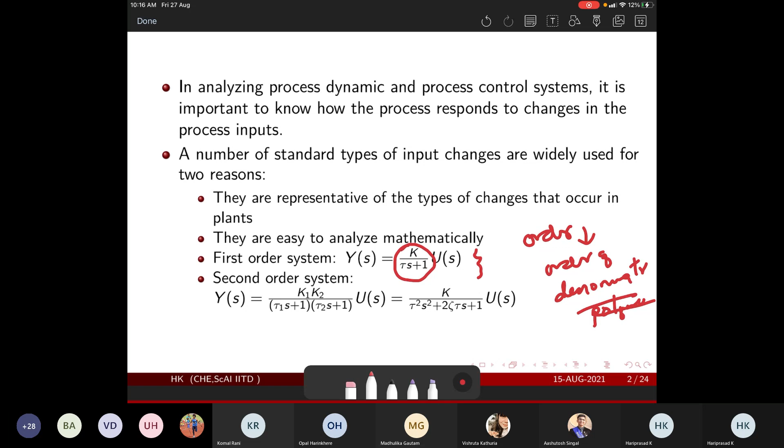Order of denominator polynomial. The variable of the polynomial is S, and we are going to look at the order of that. So first order system, we are going to see this. You see that it is tau s plus one. Tau is a constant, of course, one is a number, and in the numerator you have a constant, which we call the gain.

Any transfer function of this particular form is first order.

Similarly, by definition, a second order system: the denominator polynomial degree should be 2, of course tau square. Tau is constant, tau square, and 2 zeta tau. We'll see why zeta comes in here later, but you should see it is broadly a form of a s square plus b s plus 1. So tau square is your a, 2 zeta tau is your b, and 1.

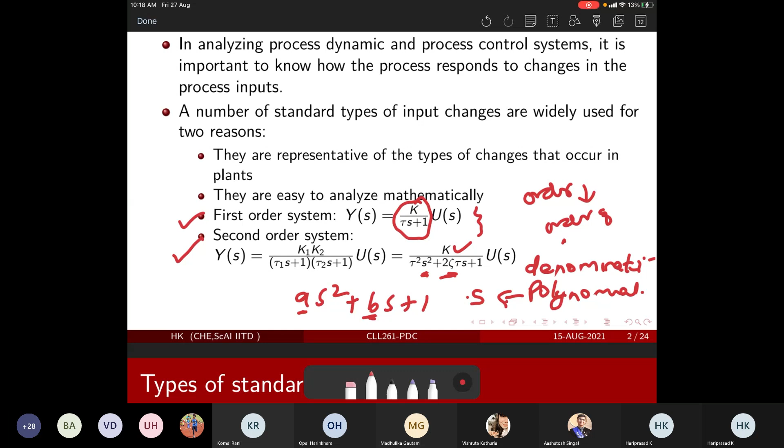And of course, denominator and numerator constant. You can also factorize it and write it as a product of two first order terms. That is what the first thing says. So this is a factorized form of the second order system, as two first order systems.

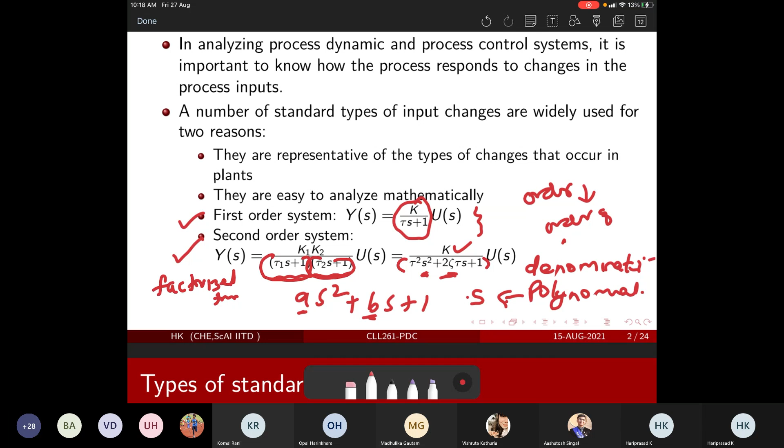We have seen last time a case where you have two tanks, and we have added them: there is a flow coming in, and that flow goes to the second tank, and finally it exits. Let's say Qi, then this is Q naught. So if you develop a model between Qi and Q naught...

We have seen that individual first tank exit dynamics are first order. We have developed the transfer function for that, and we integrate them together. This would be second order. So this is like two first order systems connected to each other. That's why I told you, in most cases you should be able to factorize them.

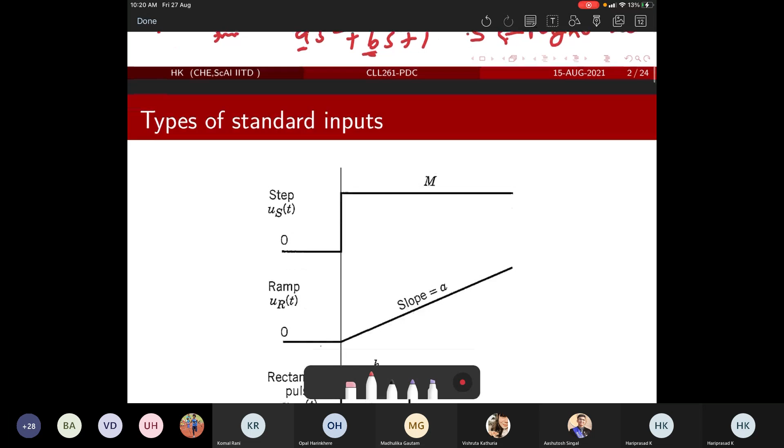So this is the basic premise we would like to operate, and we would also like to see what we need to know. Somebody was asking some question. No sir, it's just saying that.

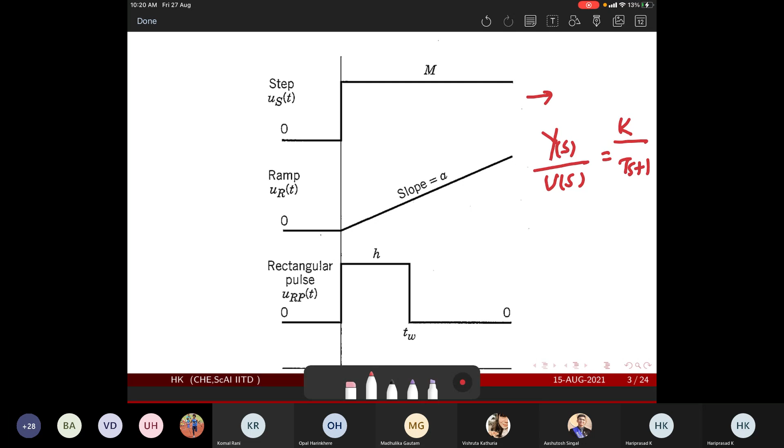Okay, perfect. So other things you would like to hear: what is our system transfer function, y of s, output by u of s? Assume it's a first order transfer function. This is the standard transfer function form. y of s by u of s is equal to k by tau s plus 1.

We are interested in this output, y of s, and it may be in the time domain, y of t. This is subject to the inputs that you provide, u of s. So u of t, or u of s in the s form, dictate the output y of t. See, it's like this, okay?

So you have a reactor, you are feeding something in, and taking it out. This is Fi, F naught, maybe concentration here. And let's say you are interested again. Consider the case where you also have a heater - this is the same example we know. We are interested to look at the outlet temperature T naught, and this is Ti, and this is Q.

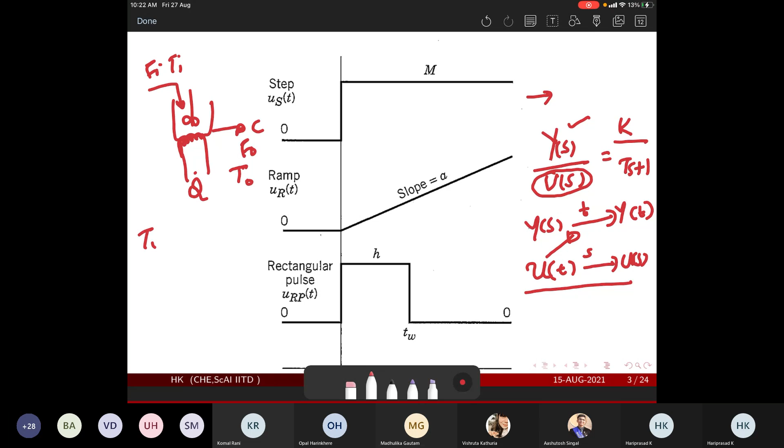So our final output variable is T naught. There are actually two inputs, Ti and Q. They are the inputs, and we would like to see how the output varies with respect to these input variables. They are not really the inputs per se, they are just placeholder names. So inputs could be anything.

The inputs you can see here is some sample input. So what is that? The inlet temperature variation, or maybe the heat input variation, could be a step - this is a step change. It essentially means that many times you did not give an input, then you suddenly changed it and kept it constant.

So heater, for instance, it's like heater off for a long time, and at that time let's say T equals 0, you started the heater, and it's like a step change, right? Then it starts imparting heat into the system, and for all future times, the heater is on.

The other one is ramp, in the sense that again, till T equals 0, there is no heat. Then after some time you switched on the heater, but you did not step it up, instead you fix the rate of change, in the sense that every minute you are changing, let's say 5 degrees C. So it's like a linear increase, the ramp increase.

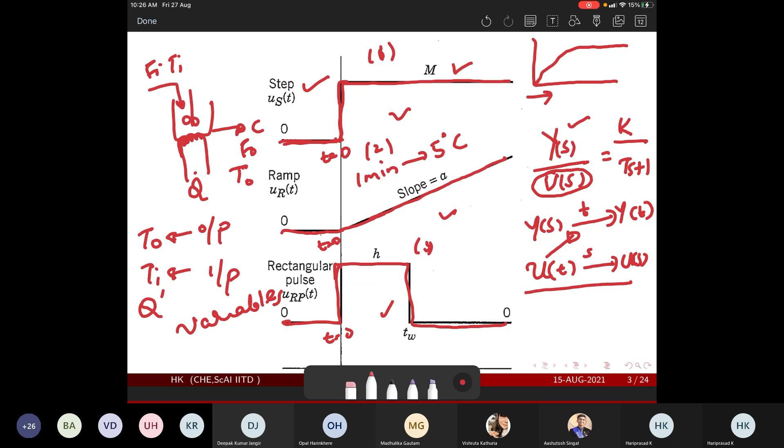Okay, so someone can think about ramp. What would happen? Can someone say please? Anyway, try to be more interactive, otherwise it's very boring. See, in ramp, your input is gradually increasing, which means that your output will also gradually increase. There is no saturation as of now.

And for pulse, as you expect, there would be a jump, step up and step down. So eventually what I'm trying to say is your system dynamics would be highly dependent upon the input that is supplied. These are three standard inputs you could expect. There are other types of input also you may see. Another one is sinusoidal, which is quite unlikely that you would use because nobody would like to oscillate your operation. So sinusoidal inputs would generally tend to oscillate your system a lot.

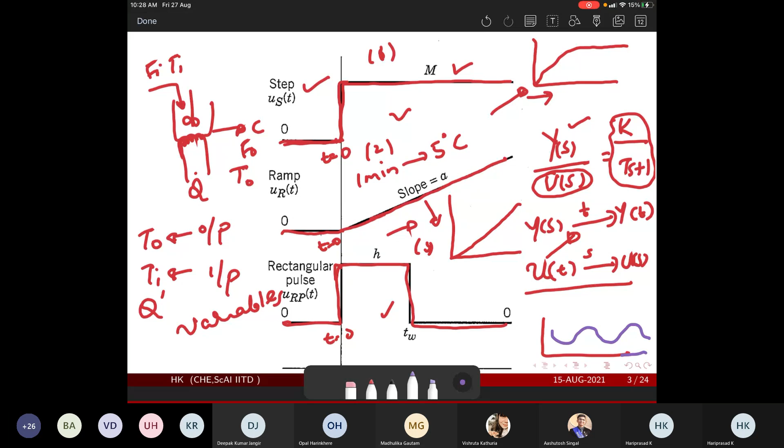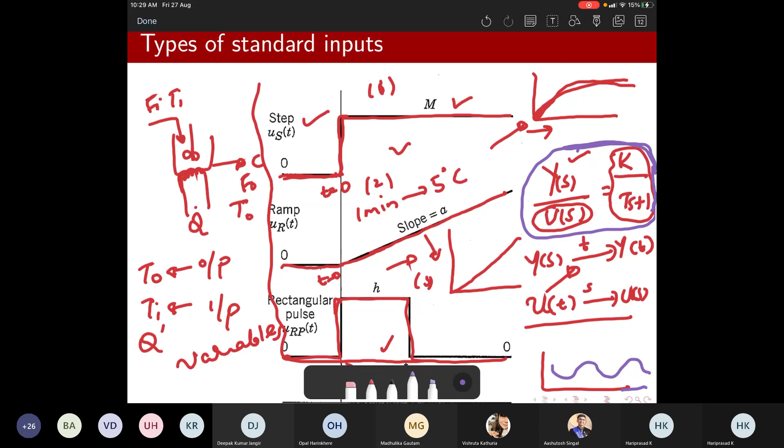So now what we are going to do, maybe in the rest of a few minutes, considering these standard inputs, can we evaluate the output response quantitatively, not qualitatively? Now we say that okay, you might have an increase, then become saturated. So if you have a first order system model, which is this, can we quantitatively express the output as a function of the input? Is this clear to you? So this is what we are going to do.

Okay, so now let's check the step input. How do you define the step input? It is many times, so let's say this is t equals 0, and this is 0, and let's say this is m, the magnitude of the step change. So generally the step inputs are defined like this. It's like switching on something. Till you switch it on, everything was 0. Then you switch on, and things got stepped up to a magnitude m, which is something that you define.

Okay, so the next one is, how do we find our transfer function? Y of s by u of s equals k by tau s plus 1. The first thing to figure out what y of t is, is to figure out what u of s is. U of s, the transfer function of a step change is 1 by s for a unit magnitude, and m by s if m is the magnitude of the step change.

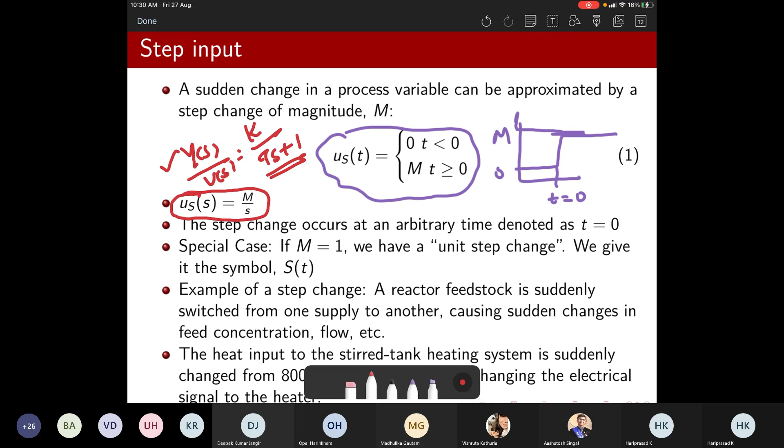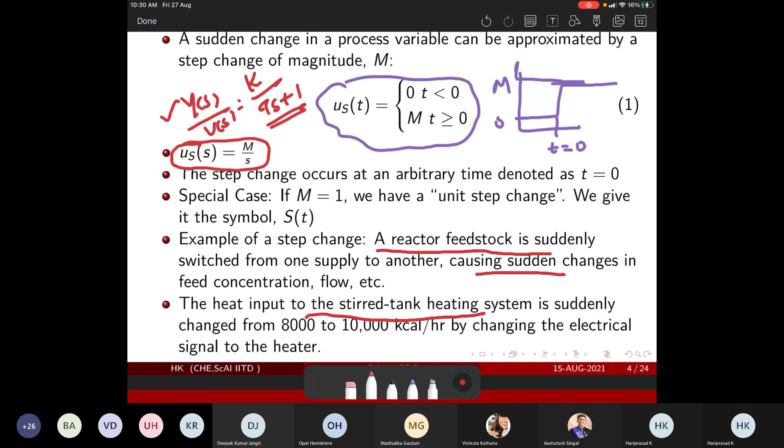This is quite standard. Step changes happen when you suddenly change the heat, sudden changes in concentration, or heat you change by changing electrical input. This is a very standard input that you would really see in the system. Step inputs are always quite standard.

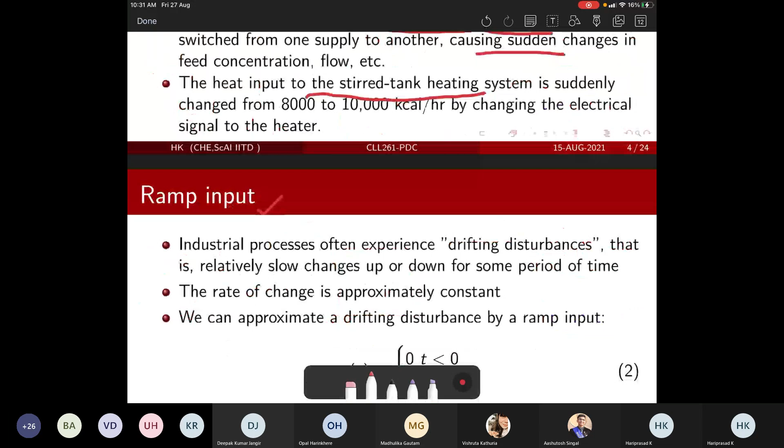Now we need to look at the ramp input. Ramp was our next example here, right? So we have to look at the context wherein you see a ramp response in the system. Basically, if there are drifting disturbances, let's say it's like this.

Fouling happens in a heat exchanger. So what is fouling? Initially, when you install a heat exchanger, there won't be any fouling because it's fresh and new. Then over time, mild scales might start to form, then those scales would increase, and it would start fouling. Over that time you would see a drifting disturbance. Maybe initially for some time you don't see anything, then you would see some small change, and so on and so forth.

So let's say at time t equals 0, there is nothing, and afterwards the input is changing as a function of time, alpha t. The transfer function of the ramp response is alpha by s square, where alpha corresponds to the slope.

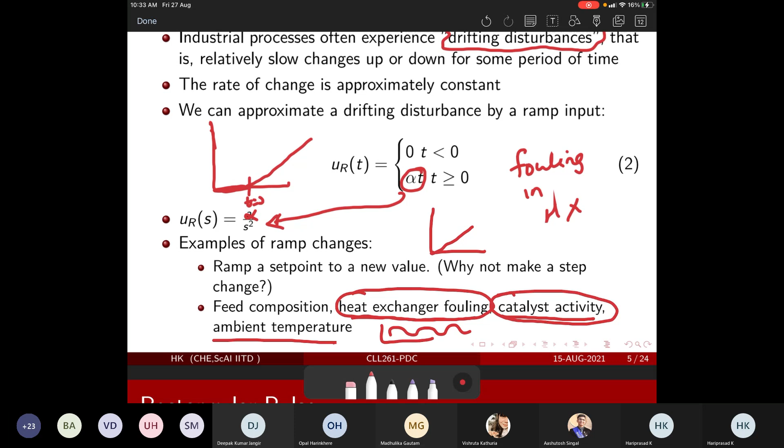Okay, so now pulse. How does it work? Initially there is no input, then it steps up for some time, a time window known as the pulse width, from t equals 0 to t equals tw.

This is a non-standard function, so you will be able to split it as a step-up function and a step-down function. But pulse being a widely used function, you will be able to get its transfer function from the Laplace transform table that we have provided. Is that there in the book? For instance, let me show you.

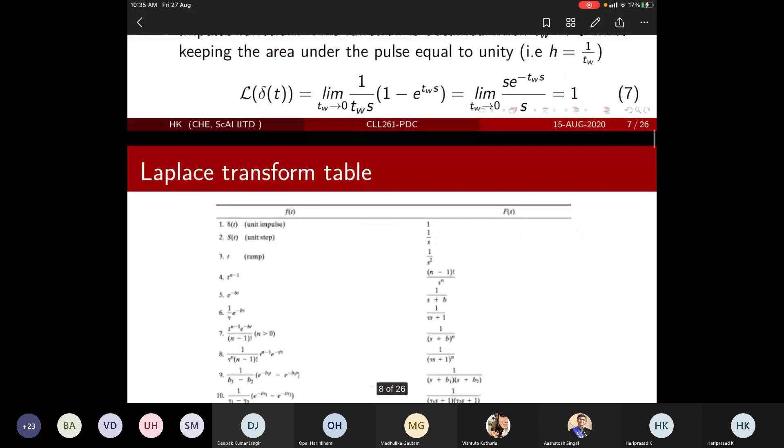You see this, I hope you got a chance to look at your textbook. Are you looking at the textbook? Any of you? Yes, so I saw this table in the book. I couldn't hear you, Vishruta. Sir, I saw the Laplace transform chapter. Hello, I think it's chapter number 3 or something.

Pardon me. Hello sir, I was saying that I saw the Laplace transform part in the book. Am I audible to you, or is it my problem? I couldn't hear—so, you are audible to us, but probably you are not able to hear us properly. Okay, Vishruta, what were you saying? Sir, I was just saying that I went through the book and I saw this Laplace transform chapter there as well.

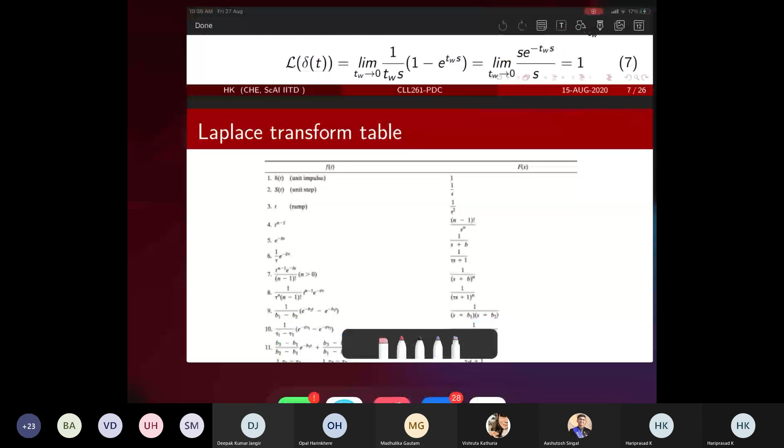Somehow, I don't know whether it's an issue with my end. I couldn't hear anything.

Okay, so could you able to at least look at the textbook? Are you following the notes and text, or you're just following what I am teaching? Anyone? Can anyone give me feedback, please?

Sir, I think we have an appendix section in the book where these Laplace transformations have been taught briefly. Yes, please look at that, and it should be sufficient for all practical purposes. We need this every now and then, even when you solve assignment problems or exams. So it's like your logarithm table. Please keep it ready, and if needed, take a Xerox copy for your exercises.

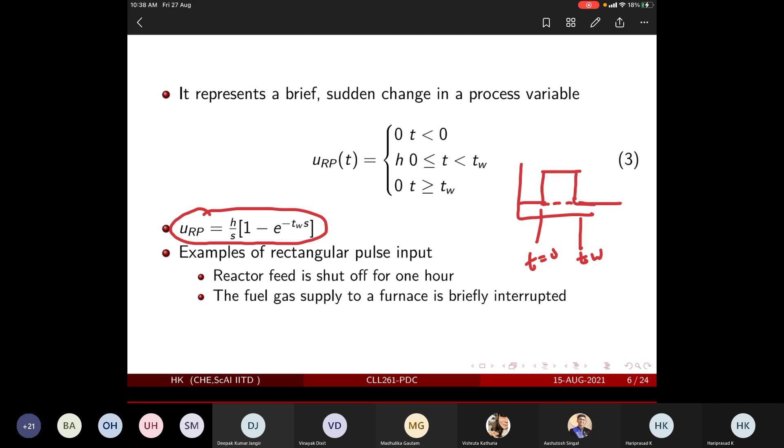From here onwards, you would be able to quickly convert a time domain function to Laplace domain and vice versa. So it may be a good idea if you practice and keep one copy of the Laplace transform table. You can of course look at the appendix of the book, that's absolutely fine, but I think it helps to keep one ready reckoner copy for yourself.

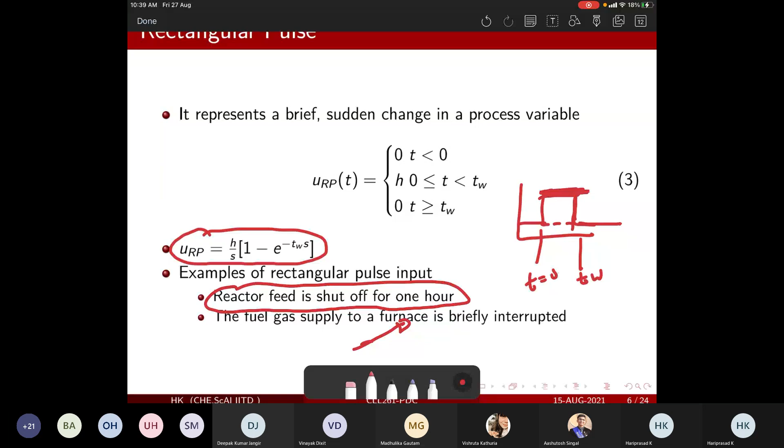So let me continue, this is also a standard thing. Mostly this would happen when you switch off the feed for some time in a reactor, or maybe there is an interruption in the fuel, so your burner is working and then there is a shut off. This is a quite standard scenario that you would encounter, and the transfer function of that is this.

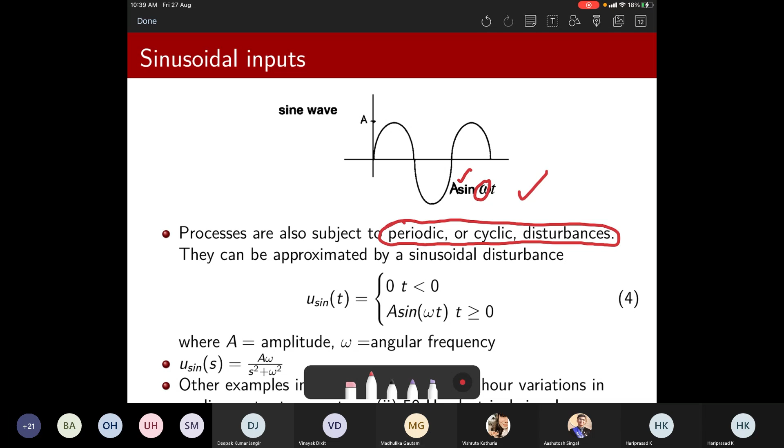Now the last one is, of course, sinusoidal, which would have a frequency omega and amplitude A. Mostly this is for periodic and cyclic scenarios, for example ambient temperature, which is sometimes modeled as sinusoidal variations. Another example is electrical signals.

Then let's say if you are using cooling water in an industry, the cooling water is actually water available at ambient temperature, used for cooling. So the ambient temperature will have an effect on the water, and cooling water temperature would also vary with respect to time. In the morning, your heat transfer rate is very high, because the cooling water temperature would be reasonably low, so more heat transfer takes place. That rate of heat transfer keeps reducing as the temperature increases, which means you are approaching noon and so on.

So this is the time domain function a sin omega t for t greater than 0, and this is the Laplace transform, a omega by s squared plus omega squared, for an amplitude a and angular frequency omega.

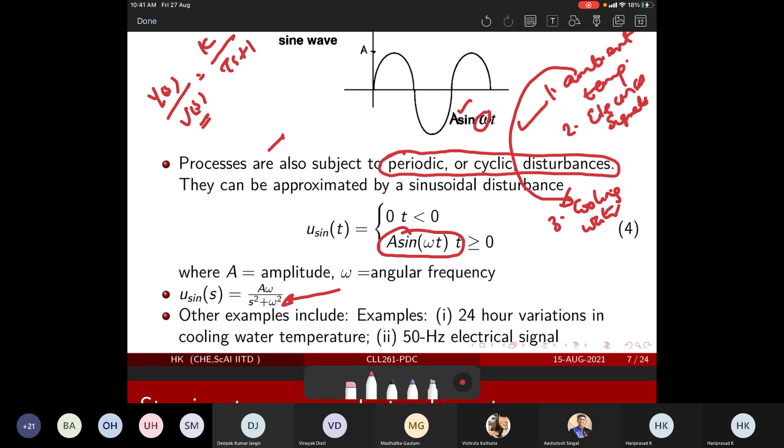So we are interested in calculating y of s as a function of... y of s basically, and u of s is calculated because it would fall into one of these candidate examples. This could also be an input, a sawtooth. You should be able to develop a transfer function for this, it's like a sawtooth, it ramps up to some time then switches off. So you can write this as a function of two standard inputs and calculate the Laplace.

Okay, so are you getting this? Are you comfortable with this? What I'm trying to say, are you able to follow it? Yes, sir.

Perfect. So what I'm trying to say is, we have looked at some standard forms, but you may be able to derive a non-standard form by combining a couple of standard forms. For instance, you would assume that there is a ramp up till here, then there is no ramp, so you can combine those two functions and get the inputs for those specific conditions.

So now what we should do is, now that we could characterize u of s, we should be able to get y of s.

So getting Y of s is quite easy. You only need to multiply with Y, U of s here. So Y of s is just a multiplication of the process transfer function with the input transfer function.

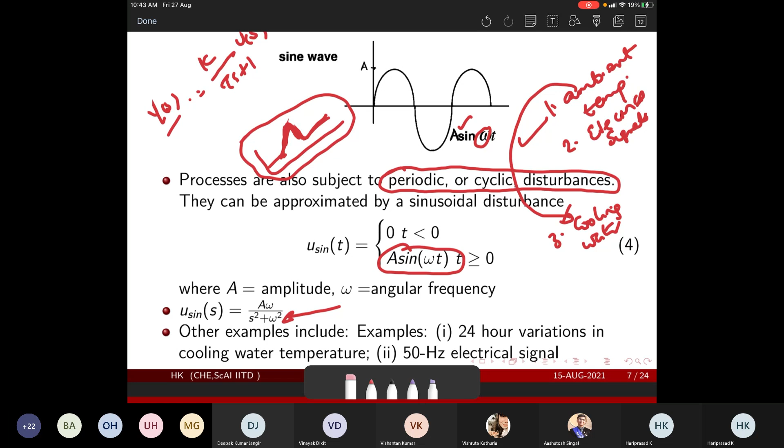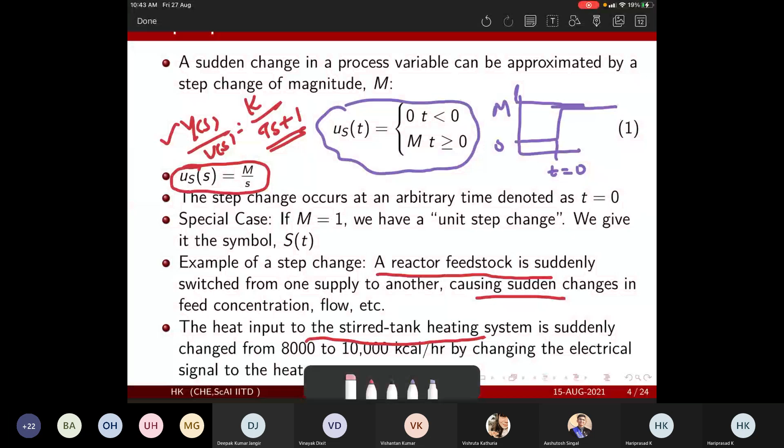Which we have seen. So in all the cases, if it is sinusoidal, it is omega over s square plus omega square. Rectangular pulse means this. Ramp input is alpha over s square for a slope of alpha, and for step input, it is m by s for an amplitude of m.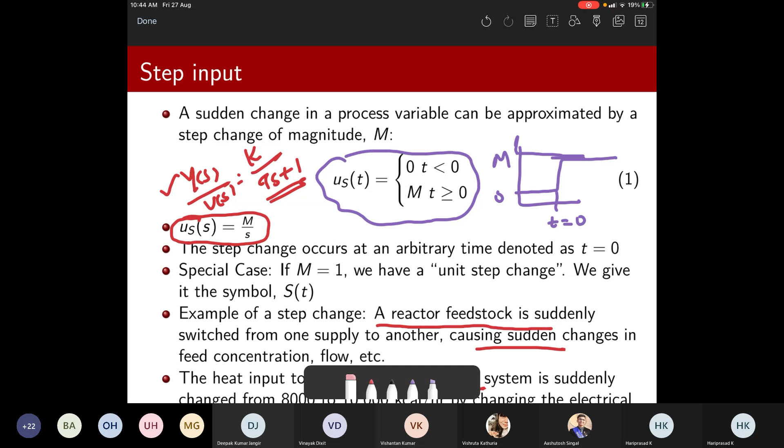So now what we have to do is get Y of s out of it, then go to Y of t, because eventually you would like to see how it is varying with respect to time, right? In the Laplace domain, things are okay. So let's see how it works.

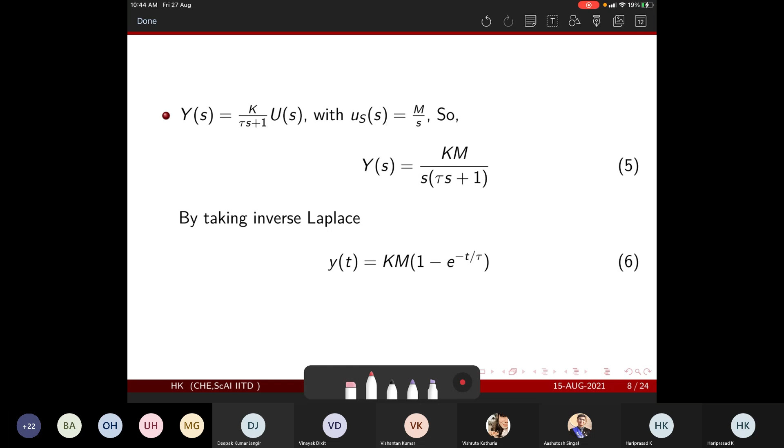Let's take the simplest example, step input. So Y of s is k by tau s plus 1, times U of s, and U of s is m by s, right? And this would be your Y of s. And how to get your Y of t? You will have to take basically the partial fractions, then take the inverse of that.

But I think in your notes, the step input transfer function is directly given. Otherwise, what you have to do is take alpha by s plus beta by (tau s plus 1), then figure out what alpha and beta are and take the inverse.

Is this clear to you? Any question? Okay, so sometimes for a step function, the direct inverse Laplace might be available in your table.

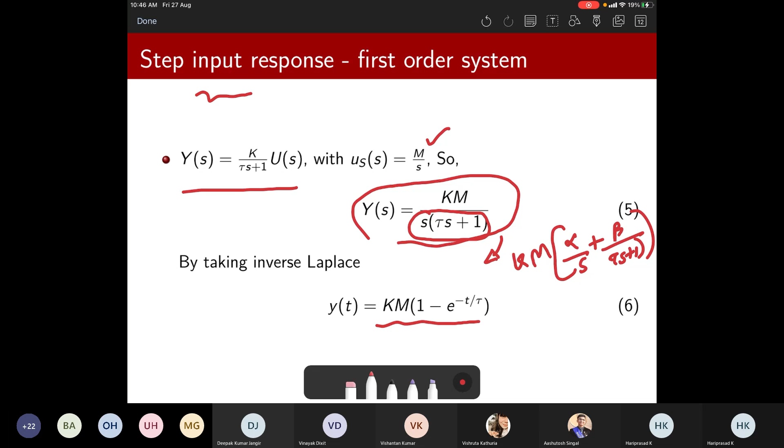So it would be easier for you to figure out. So Km would be the constant, and 1 minus exponential of negative t by tau. So that's all about it.

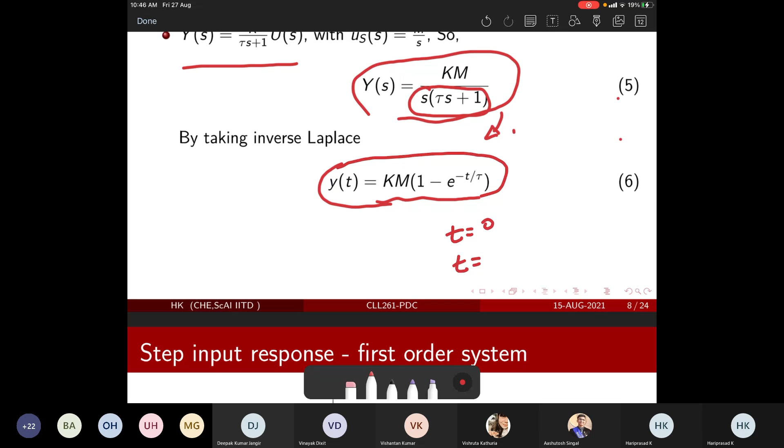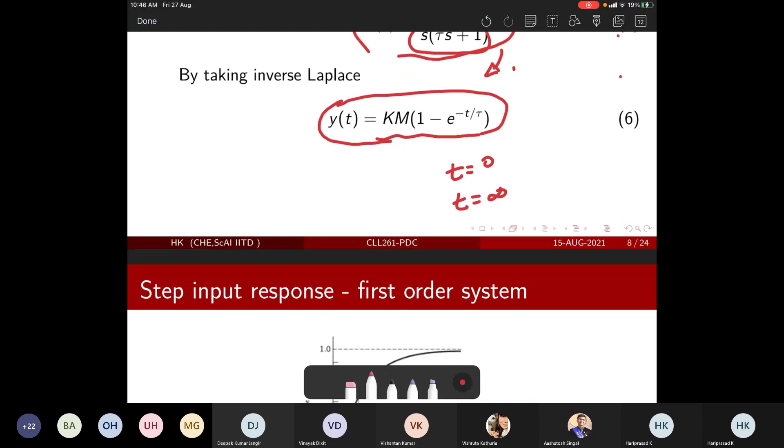So how does this response look like? How does this response look like? We can see how it works. So we have to look at t equal to 0 up to possibly t equal to infinity, so that we can quantitatively characterize it. When t is equal to 0 essentially means that...

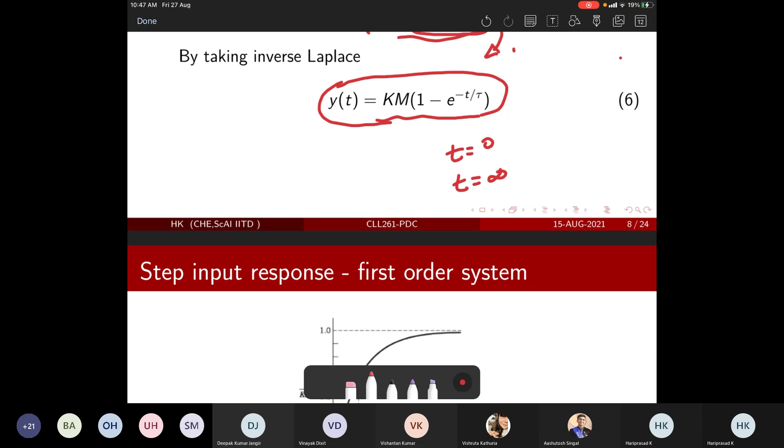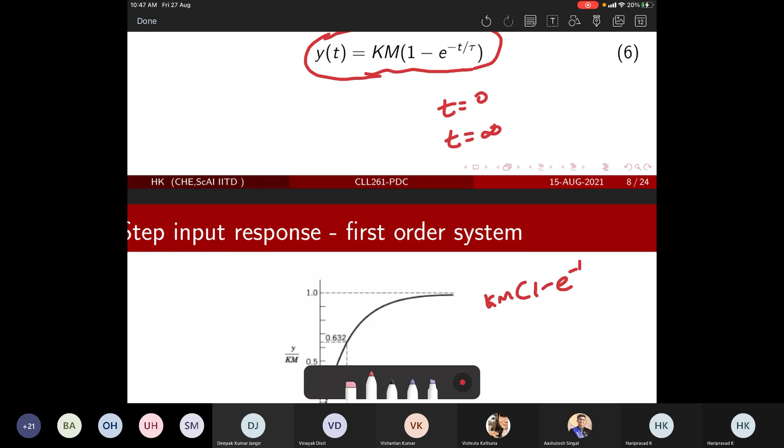So Km times 1 minus exponential. So we can see at what time. Here we are plotting as a function of t by tau. When t by tau is equal to 0, which essentially means that initially there is no response, and when time tends to infinity, or when this becomes large, initially the whole term would be like 1 by infinity, and it would go to 0. Otherwise, this would keep on increasing and eventually it would saturate. This is what we have seen.

And for a first order system, one important property is that when t by tau is equal to 1, it means t is equal to tau. When time becomes tau, the process might have at least completed 63%, 63.2%. This is like a characteristic. You can also say it for t equal to 2 tau, but I think it is mostly characterized by t when time t is equal to tau, and this tau is called the time constant.

So time constant is defined as the time taken for completion of 63.2 percentage of the overall change. Here you see it keeps on increasing, and finally it becomes steady state. But 63.2 percentage of the overall change happens in tau time units. If time is in seconds, it is in seconds; minutes, it is in minutes; hours, it is in hours. So this is called the time constant.

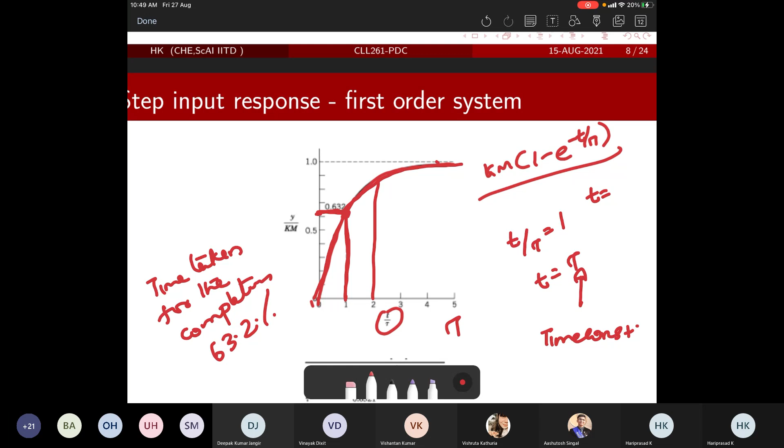Any questions? So this is something that you would keep on hearing every now and then. Any questions at the moment? You can actually calculate it. So this is the way it works.

So when t is equal to 0, you would find it to be 0. At 1 tau, it's 63.2%; at 2 tau, 86%, and the process becomes slower. At 3 tau it becomes 95%, at 4 tau it becomes 98%, and at 5 tau it will be close to 100%.

If it is only for a first order system plus step input, no other inputs would hold. No, if you're sending a ramp input, this is not the response.

First, this is the response of the first order system with step input. Again, example is your heater. You stepped up the heat duty, and the new temperature - this may be the temperature with respect to time. It increases and finally becomes steady state. This is your Q, heat with respect to time.

Any questions so far? Is this all right to everyone? Yes, sir, yes, sir.

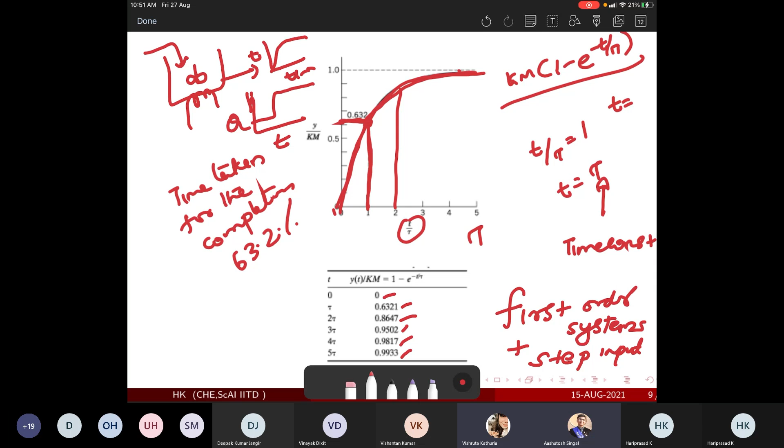Okay, so now we will also look at the ramp input, and we will possibly stop the figures. So first order system with step input we have seen. Now let's see first order system with ramp input.

Again, the transfer function for a slope of a, the transfer function would be a by s square. So y of s would be - you have to substitute k by tau s plus 1 times a by s square. So it would be y of s becomes ka by s square into tau s plus 1. This is of course not in your table because this is completely non-standard form.

So what you could do is split them into partial fractions: alpha 1 by tau s plus 1, then s square becomes alpha 2 by s and alpha 3 by s square. So you will have to figure out what those alphas are, and you would see that ka tau square is alpha 1, ka is alpha 2, minus ka is alpha 2, and ka is alpha 3. Please verify this.

Of course, this is very simple math, please verify by yourself.

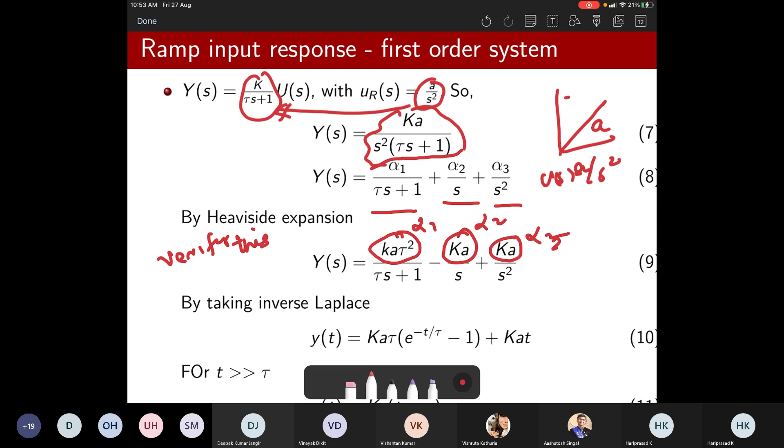What you would see eventually is when T is really greater than tau - when t becomes close to, let's say, infinity, like a large number, so t is much greater than tau, which may be close to thousands or hundreds - this term eventually contributes less. So minus t by tau would eventually become nullified, and what you would really see is this term would tend to dominate: the second term, which is kat, because it's directly multiplied with time. That would really mean ka times t minus tau would be the final value of the response after some time.

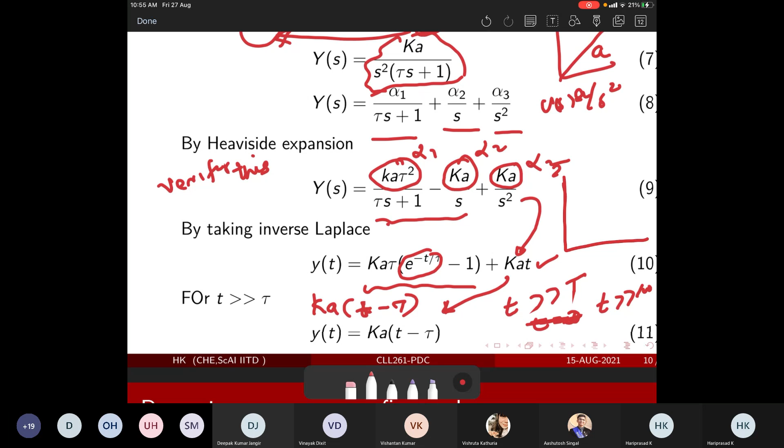So if you try to plot its dynamics, what you would really see is initially this factor might dominate. So you would see a mild bend in the response - look at it, there is a mild bend, it's not a straight line here.

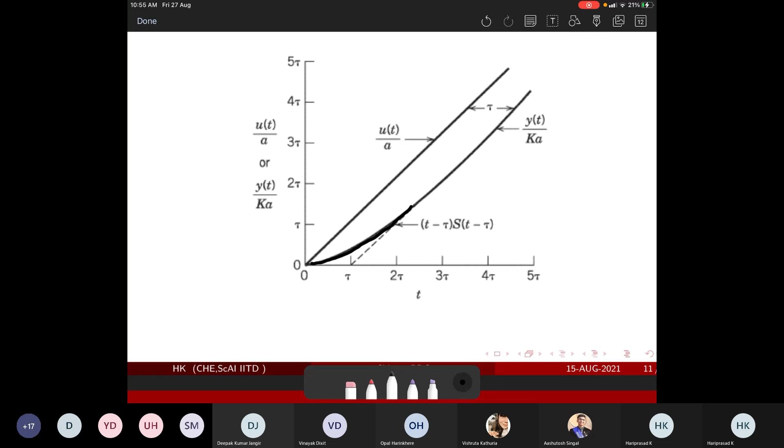Then you would see it behaves like a straight line when t is very large, so you can also approximate it as a straight line. That's what we see here - you see the initial response, you would see a bend when both terms contribute, because the exponential term would tend to play more initially, and after some time it would become flat. This is the input profile u t by a, and this would be your output profile.

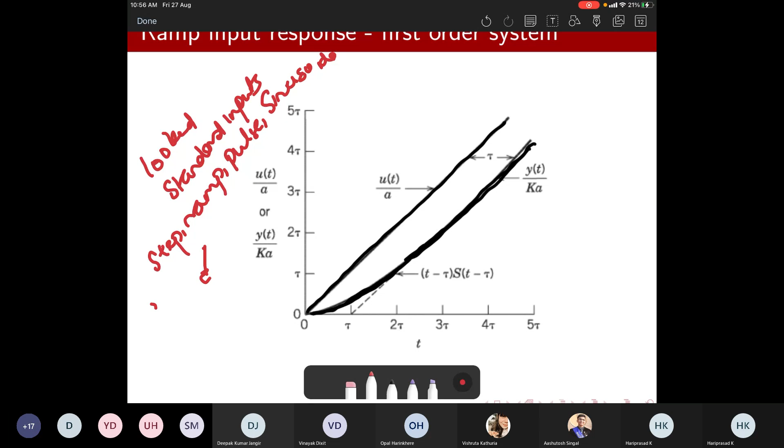So any questions so far? Just to recap what we have done: looked at standard inputs - step, ramp, pulse, sinusoidal - then tried to derive the outputs of the first order system for step and ramp. That's what we have done today.

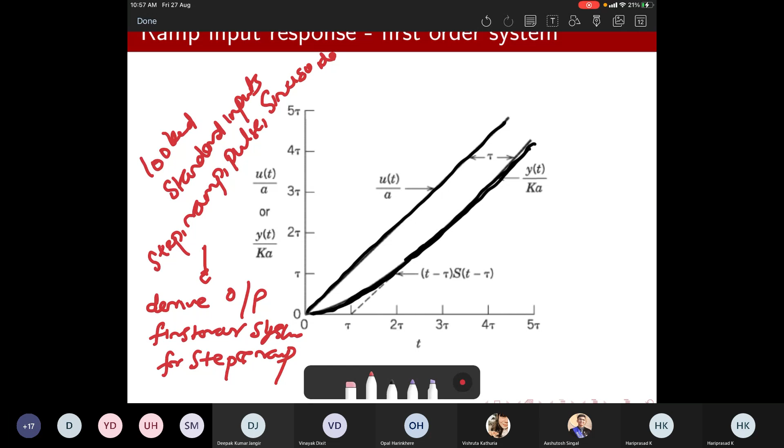The next class we will look at sinusoidal input and how the response looks like, then we will go to the second order system. And that's the agenda. So any questions so far?

Any questions so far? Any questions so far? No, sir.